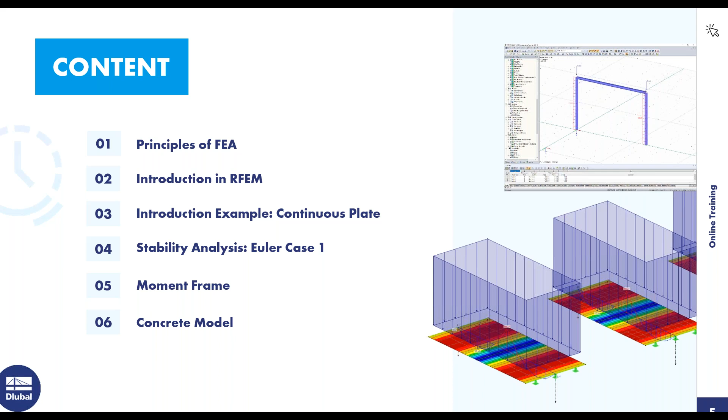So that's it for today's content. Let's start with the basics of FEA software.

When using computer software, it is mostly based on the displacement method. Another method you may be aware of is the force method, where the unknown is the force, and then the internal forces can be calculated.

With the displacement method, the unknown is the displacement, and to solve for this displacement, the displacement vectors must be calculated, and then the internal forces followed by the support reactions.

The main problem today is an analytical solution can be difficult with large complicated structures. So doing hand calculations for some structures with complicated and/or odd geometry can almost feel and be impossible. The limits are being really reached with large complicated structures, and it's hard to get accurate results sometimes. And this is where FEA software comes in and helps.

With FEA software, first, the structures are modeled and converted into a finite interconnected element mesh. Then the material and cross-section properties are given at each FE node. And then the mechanical behavior is transferred between these elements.

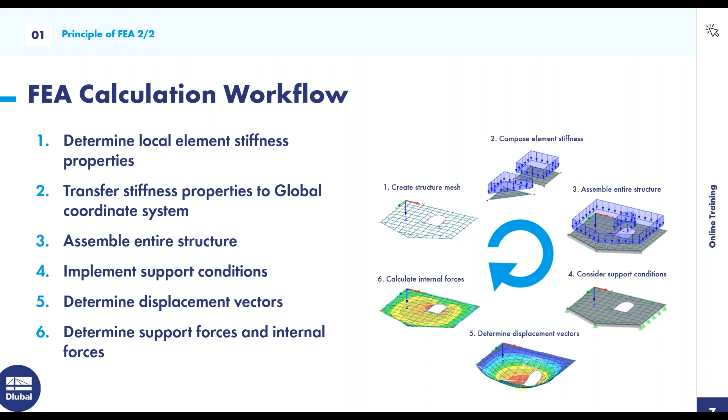All right, so I see some answers coming in. A couple people are saying C, some are saying A. I'll give another 30 seconds to see if there's any more. All right, so it looks like it's pretty split between C and A.

So for this question, what is discretization? The answer is A: it is a structure being converted into finite elements. The other answer a lot of people are saying, C, submeshing finite elements into smaller elements, I could see how that might be confused, but structures converted into finite elements is the correct answer.

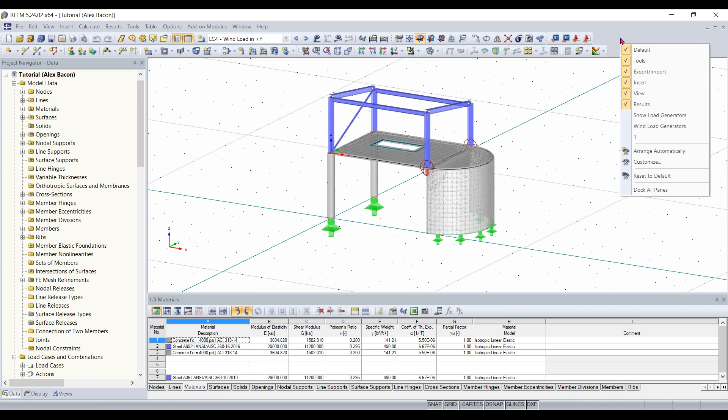The toolbar is what we have up here with all of our tools. Right now it's organized based on the tool, and it kind of looks a little daunting right now with all the tools if this is the first time you've opened RFEM, but over time you'll find it's easy to find the tool you're looking for. If your toolbar does not look like my toolbar, you can simply right click anywhere in this gray area and have this reset to default, and all of these buttons will be reset to default and organized for you.

Up here we have our insert menu where you can insert things like model data, loads, and load cases and combinations. There's also buttons in the toolbar for this. We also have our views up here that we can change through, so we can click through here on our buttons and change and go through our different views.

Then within the project navigator, if I scroll down here, we have our long list of add-on modules, which I'll go over in more detail later on throughout this training.

Next, we have our display tab. Within the project navigator, we have multiple tabs down here. One is called display, and you can see this has a similar design layout to the data tab. Basically, it uses collapsible and expanding folders that you can expand and change different things that are displayed within your model. For example, I can turn off my surfaces if I would like within my model using this. So lots of customization within this tab.

And then we have our views tab. This allows us to change some views and change things within our model. So if we wanted to take a closer look at just our members by a certain material, say I wanted to look at my members made of steel A992 material, I can turn this visibility on, and everything else about my model will be grayed out, allowing you to focus easier on some things and find some things better.

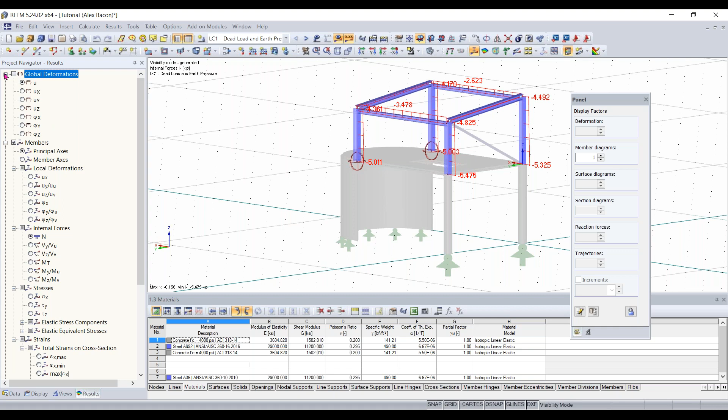And then the next tab, which isn't here right now, will be our results tab. So if I just run a simple dead load case real quick, my results tab will pop up. Within this results tab, we'll go over this in more detail later, but just briefly, this allows us to show which results we would like to see within our work window. It allows us to change and go through deformations, member internal forces, surface internal forces, and strains, along with support reactions, sections, etc. We'll go into more detail with that later.

Next thing is how to move your structure around, how to control it. Right now I'm using a mouse with a scroll wheel, so I can simply click my scroll wheel in and move it around. I can hold control and rotate my model, and I can also zoom in and out with the scroll wheel.

If you do not have a mouse with a scroll wheel, you can go up here to this button called move, zoom, and rotate. I can then just click and move my model around. I can hold control and rotate, or hold shift and zoom in and out. If you're using a trackpad and don't have a mouse, you can use the keyboard and hold control, using the arrow keys to rotate. You can use the arrow keys to go up and down, and then use the plus and minus buttons to zoom in and out.

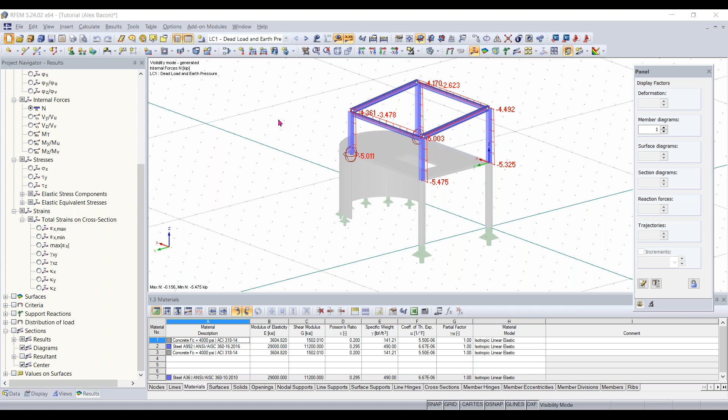We also have a function within RFEM, a project manager, where you can organize all of your models within a certain project folder. If you have a project with lots of different models and don't want to have to keep saving them into a certain folder, this will do it for you. It helps keep everything organized and keep your projects organized.

Next, we have the type of model that we would like to set. For this model, I'll keep it a 3D model. You can also create 2D models within the 3 different planes if you'd like.

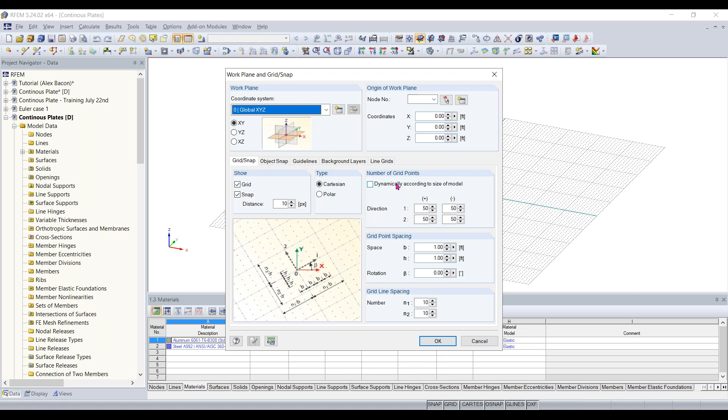We also have the option to change the amount of grid points dynamically according to the size of your model if you'd like. Also, another thing I wanted to point out before we started: if you work in metric — right now for this training, I'll be working in imperial units — but just know that if you want to change your units at any time, you can go up here to Options, Units and Decimals.

If I click on that, you'll see that right now I'm in imperial units, and I can change any of my units for any aspect of my modeling, loading, and results. I can also go down here to this button that says 'load saved profile.' If I click on that, I can double click on metric and change my units to metric if I'd like. I can also set metric as default, but like I said, for this training I'll keep them in imperial. Just know you can change those at any time throughout your modeling.

Hey Alex, another quick question, maybe before we get into it that you can address. We have a question: is it possible to import a DXF or DWG file in order to create the model? Yeah, great question.

You can do that. The way to do that would be to go up here to File, and then we can import different file types. If I go to File, Import, you do have the option to import DXF files and DWG files from CAD or AutoCAD. So you can see we have a lot of different formats and types here. We have the DXF file import, and we can also do direct imports through Autodesk and AutoCAD.

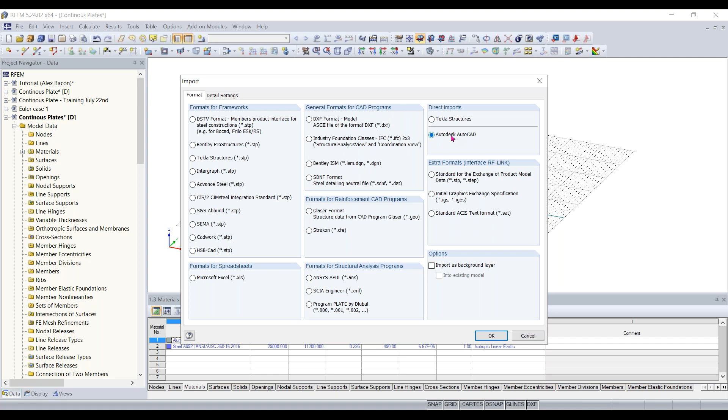Just to further clarify on that: DXF file import is possible. DWG must be converted to a DXF in order to import. This would mostly be used for maybe a background layer, to snap to different points or to import line elements. The direct integration Alex mentioned will allow you to actually import members and 3D faces into the program, and as long as the materials and cross sections match between the two programs, the model will automatically be generated with those member and surface elements. So that's the difference between those two options.

Yeah, that's right. Thank you for that clarification, Amy. Awesome, go ahead. Okay, thanks. Thank you. Yep, you're welcome. All right, awesome, thanks for the question and clarification.

So yeah, let's get into creating these continuous plates.

So the first thing I'm going to do is create a rectangular surface on our grid here, and that surface will be 32 feet by 16 feet. So if I go up here to my new rectangular surface button, and once I click on that, this dialog box will pop up, and all we have to do is tell it which material we'd like to make this surface out of and the thickness of it.

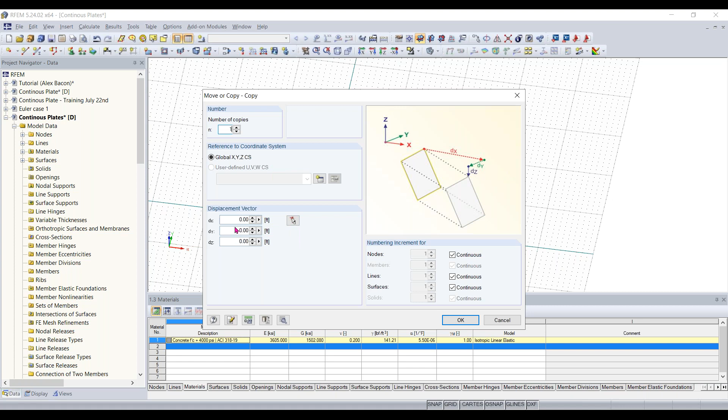I'm going to type in 1 for the number of copies, and then I can either type in the displacement for where I want this plate to go and in which direction, or I can use this button to select 2 points graphically. So I'm going to click on the bottom left-hand corner here, and then I want my plates to be spaced out by 5 feet, which will be right here.

Next we want to create our third plate. I can either use the move and/or copy tool again if I'd like, or I can just highlight this plate.

Then I can hold Control and take this node here, and simply drag my plate. I'll make sure it's 5 feet apart, and then you'll see it made a copy of my plate after I dragged it, because I was holding Control. That's a pretty easy way to make copies of something in RFEM if you know exactly where to place it.

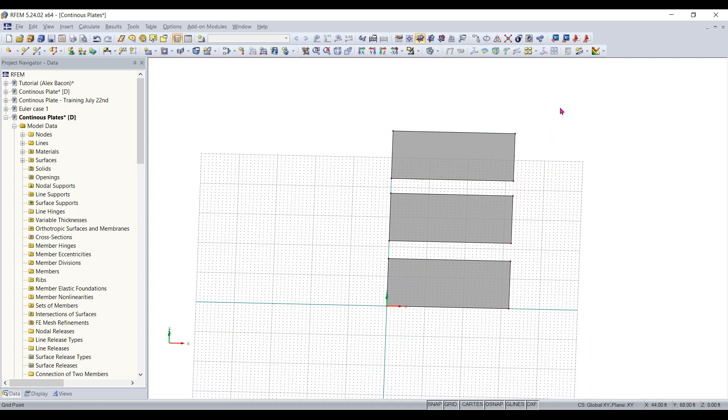So now the next thing I want to do is go up here and turn my tables off, just so we can get a better view of our model here. And I want to take all of these plates and simply drag this and place it directly in the center here of my origin.

Now that we have our 3 concrete plates at a thickness of 12 inches, I'm going to create my continuous beam. To do that, to create a new member in RFEM, we can go up to Insert, Model Data, and then down to Members.

I can do it graphically. It's asking me if I want a single member or continuous. We have a lot of different options here for our members. You can also just go up to this button called New Single Member, so I'll click on that.

Once I click on that, I get this dialog box, and I can fill out this information. Right now it's saying this will be member 1. I can do a rotation of the member, but the main thing I need to do is tell it which cross section I want and the material.

Since we don't have any defined here, just like the plates, I can go to my import from cross section library button. I can also create a new cross section if I'd like. I'll click on import from cross section library, and the cross section library will pop up.

You can see that our cross section library is organized by rolled cross-sections, built-up cross-sections, parametric thin-walled, parametric massive, and timber. You can also create user-defined sections. For this example, I'm going to go up to parametric massive, since we're just going to use a rectangular concrete section.

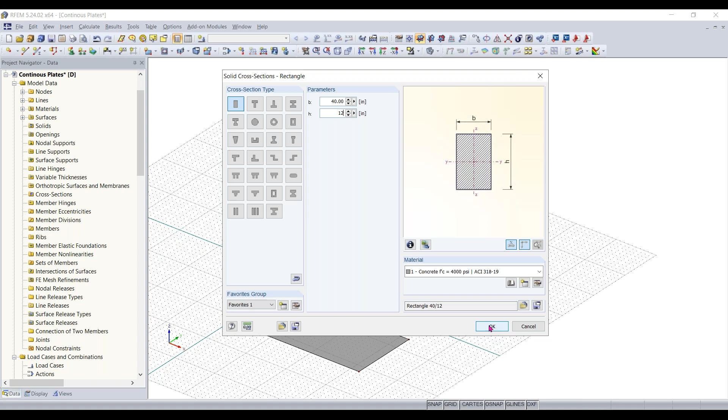Once that's all filled out, I'll click OK. Now you can see our cross section is here with our material, and this is the start of the cross section. So I'm going to click OK again.

Now I can simply graphically draw my member anywhere on my grid. One thing I forgot to mention is that your cursor does snap to these grid points, which is why changing the spacing of your grid points is important, so you can easily draw out your members graphically.

I'm going to place this member 5 feet from this upper plate, and it's going to be the same length as our plate, so 32 feet long. I'll left click, and now you can see that our member has been drawn out. Now we have our plates and our continuous beam here.

Hi, Alex. We have a question. What is the difference between parametric and standard sections? Maybe you could explain parametric versus choosing a section from, let's say, one of the standards.

I'll go back to the cross-section library to point that out. Basically, standard sections are all based on a standard. If I click on our rolled sections, our W beams, you can see I choose a standard here, and these sections are based on that standard — you can't really change the dimensions of these.

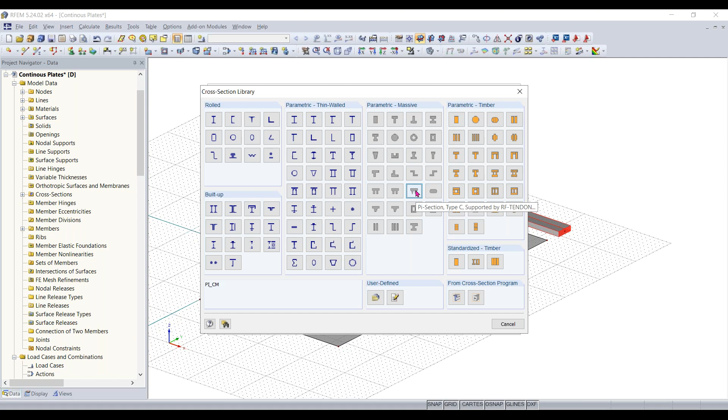Okay, thank you. Yep, you're welcome.

So we created our continuous beam, and now the next thing we want to do is divide our lines here. I want to add some line supports, or a middle support, to each of our spans, to our beam and our plates.

To do that, I'm simply going to divide our lines. If I want to divide a line, I can right-click on the line and my shortcut menu will pop up, then go to Divide Line. You'll see a couple different options for dividing lines — you can divide a line graphically, tell it how many nodes you need from the beginning and end of your line, or tell it to split at a certain distance.

So for this line, for example, I'm going to divide it graphically, and I simply just want to divide it exactly in the middle. So I'll go to 16 feet, and left click. Now it'll place this node and split both of these lines directly at that node.

I'll right click, and then do the same thing for this line up here. I'll right click, go to divide line graphically, and place a node here at node 16. Now both of my lines here are divided.

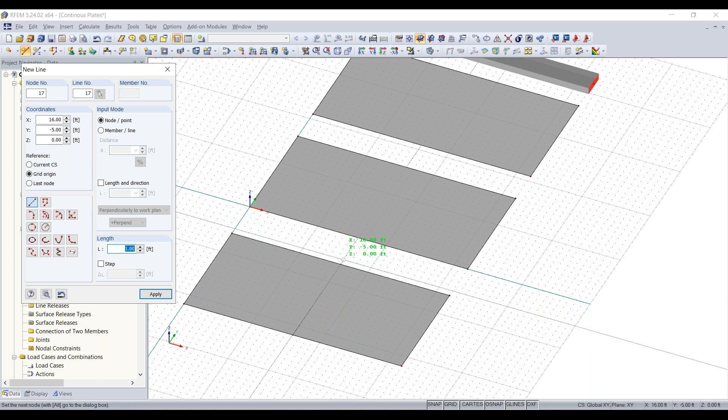Then I'll right click to exit out of that line. And then the next thing I'm going to do is, instead of having to divide these lines here, take this line that I just drew at the midspan, hold Control, and drag it directly above.

Then I'm going to do the same thing. I'll select this line, hold Control, and drag it to the next plate. I must not have hit Control before I dragged it, so let's try that again. There we go. Now we have all of our midspan lines here on our plates.

Next, I'm going to divide my beam here. I'll right click on it, then go up to divide member, and this time divide it by a distance. I could have done this graphically, but for example purposes, if we choose to divide by a distance, this box will pop up, and I can choose the type of division: divide the line by an intermediate node, or place a node on the line without dividing it. We'll have it divide the actual line with the new intermediate node.

Then for the distance relative to, I want the whole member length. You can do projections in a certain direction or on a certain plane. Basically I just want to divide this line at the very center, so 50%. You can also type in a length from the member start or member end.

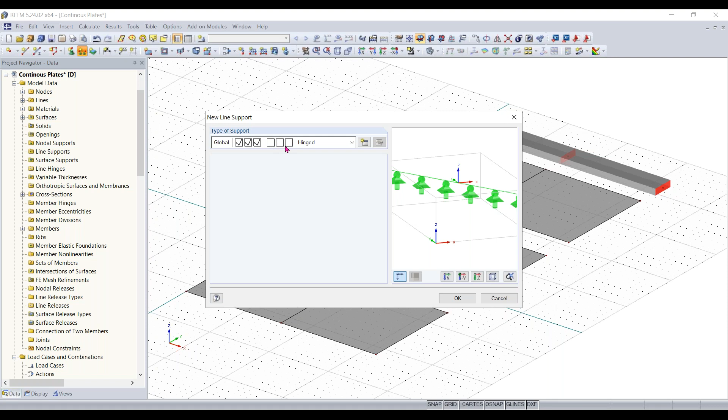So rotation is all released, all degrees of freedom. Translation is all fixed. And then for rigid, we would have all of our translation and rotation degrees of freedom completely fixed, and you can see what those supports would look like here in the graphic.

You can also create new types of line supports, not just the presets. If I open up new line support here, this box pops up, and you can see we have our 6 degrees of freedom, where you can check the box to fix it, or uncheck the box to release it. You can also add in spring constants, and we have nonlinearity options for our supports as well. For now, I'm going to stick with hinged line supports, and I'll click OK.

Once I click OK, you can see this little icon next to my cursor, where the program is saying, okay, which lines do you want to apply these line supports to? I'm just going to apply them to the end, middle, and start of our plates here.

So now all of our line supports are added to our plates. I'm going to right click because now we want to add our nodal supports to our beam up here. I'll go up here to new nodal support instead of new line support, and you'll see this looks basically the same as the line support tool, just nodal supports at point locations instead.

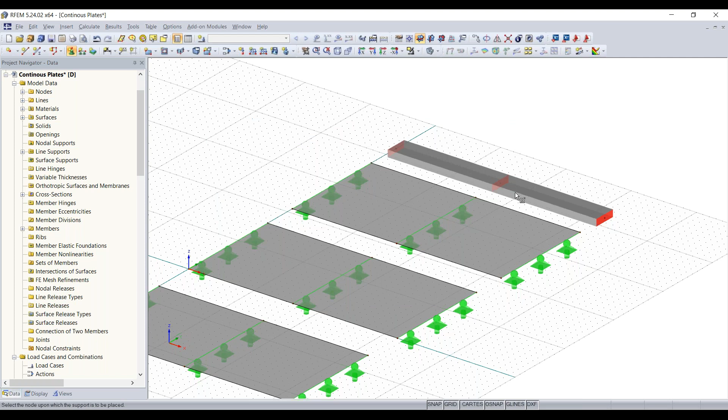Again, we have presets, including sliding in the X direction and sliding in the Y for your rolled supports. I'll keep it as hinged for two of our supports, so I'll click OK. The end of our member here will be a hinged support, and the middle will be hinged too. But our last support here needs to be defined differently.

So I'm going to create a new support for the start of our member here. This support is going to be a hinge support, but I'm going to fix rotation about the local x-axis. And I'll click OK.

The reason I had to create this new support type is because if I had made this whole member all hinge supports, then this member would have infinitely rotated about its local axes. Let me show you its local axes real quick. I'll right click on the member and turn our local axis system on for our members. You can see this is our local axes—Z, Y, and X in lowercase—independent from our global axes. We would have gotten an instability if we'd had all of the rotation released, because it would have just spun about this x-axis. That's the reason we had to create this independent support here, to keep it from rotating.

So now we can add the loading to our model here. We can do this in various different ways within RFEM—we can add our loading through the tables here, I can go to table 2, or I can also do it through the project navigator. But the first thing we need to do before we can add in our loads, which is very important, is to create a load case, because every load needs to be assigned to a load case.

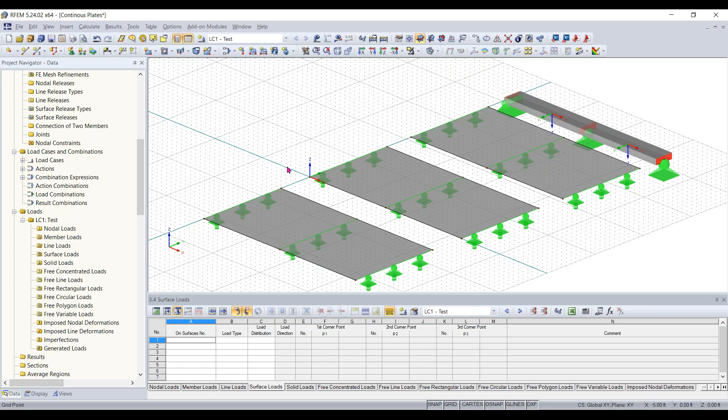So if I wanted to add any of the loads here, I could do so. But I'm going to go up here and click on a surface load because we want to add loading to our surfaces here. So I'm going to click on this button called New Surface Load.

Once I click on that, I need to go through this dialog box. Basically it's telling me the number of the load assigned to this load, and it's asking me what surface numbers this load is going to be on. You'll find out after I fill this information out that we can just graphically assign the loading.

So I want the load type of this load to be force, and I want the distribution of it to be a uniform distribution, so I'll keep that the same. Then I need to specify the direction. I want it to be in the global Z-axis. And now I just need to tell it a magnitude. This is set in kips per square foot, or KSF.

I'm just going to have it be negative because I want it to go downwards, 0.210. So basically 210 pounds per square foot.

I'll click OK. Now you can see my cursor has this icon next to it telling me I can select my surfaces that I want to apply the loading to. So I'm going to apply it to this first surface, the second one, and then the third one. Then I can right click and see my loading graphically now.

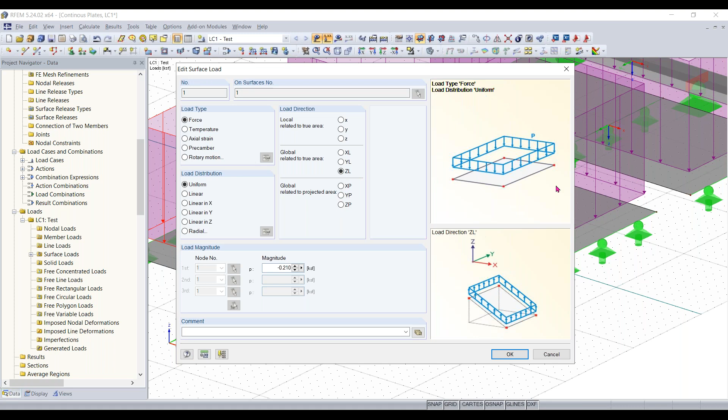So we'll stick with the true area, which I guess, for example, for this, it wouldn't really matter if we chose projected or true area since it's completely flat. So we'll click OK. And now we have our loading placed on our plates here, 210 pounds per square foot. Now we just need to place the loading on our continuous beam here.

I'm going to turn off or hide the loading here, just to make things easier to see.

To place a uniform load on a member instead of a surface, we have two options: a new member load. We also have this new line load tool, which is only for lines that are not members, so keep that in mind. For members, always use member loads, and for line loads, always use the line load tool. So we'll click on new member load.

I'm going to go through this dialog box again. You can see it looks similar to the surface load dialog box. The load type will be a force, and the load distribution will be uniform. You can see we have some different options here for that. We also have the load direction.

So for global related to true member length, we're going to choose that one. Again, you can choose projected in the global direction, or you can choose the local axes. For load parameters, we're going to keep the loading relatively the same as the loading on our plates, so that would be negative 0.210 kips per foot. We'll click OK.

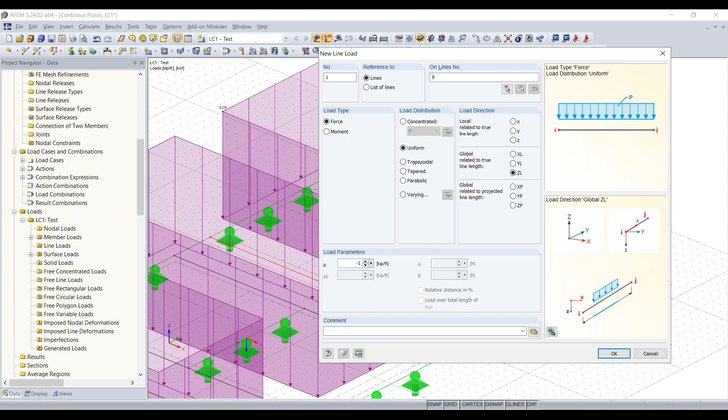So let's say I wanted to apply loading along the perimeter of my plates, I would use the line load tool and simply type in a magnitude. If I go back to the line load tool, I could use it to apply loading to the lines that make up the perimeter of my plate here—they're not members, they're just lines. But if I wanted to apply a load to a member that actually has a cross-section and material assigned to it, I couldn't use just the line load tool—I'd have to use the member load tool.

I think an easy way to remember is: member loads should be applied to members, and line loads are applied to either surfaces or solids. Otherwise, the program will flag you with an error. So yeah, that should explain it.

And just to let you know, on that third surface, you still have an existing line load that you'll want to delete. Oh yeah, okay. Thank you, Amy. Yep, sure. Okay, thank you. You're welcome. Great question, so I'm going to delete that.

So now we have our loading, and the next thing we're going to do is add FE mesh refinements to these plates here. So just a quick overview for our FE mesh.

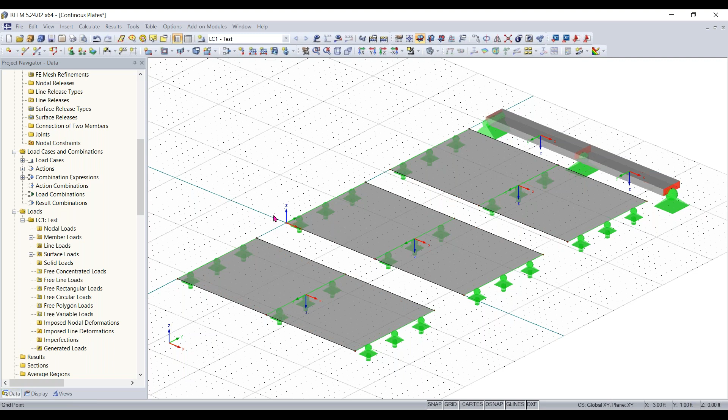Basically, the FE mesh in RFEM is automatically created when you run your calculation. There's a set length to your finite elements—by default, with imperial units, it's 1 foot by 1 foot. But let's say you wanted to change that mesh length for a certain element, say these plates—you don't want them to be 1 foot by 1 foot, you want to change them to something smaller and more refined. You can use an FE mesh refinement to change the finite element length on a certain plate.

So I'm going to add different FE mesh refinements to these plates. This might be a little confusing right now, but it'll start to make sense as we move through the example. I'm going to start with this plate by clicking it.

I'm going to right click on it, then go up here to the option New FE Mesh Refinement, and click New. It's saying I don't have any FE Mesh refinements defined, so I can create a new one, which will be applied to our surface here.

For this first surface, I'm going to have a super fine refinement, with my target FE length set to 0.2 feet. I'll click OK. Now you can see this icon telling me an FE mesh refinement is placed on the surface, and this symbol shows how large that finite element will be.

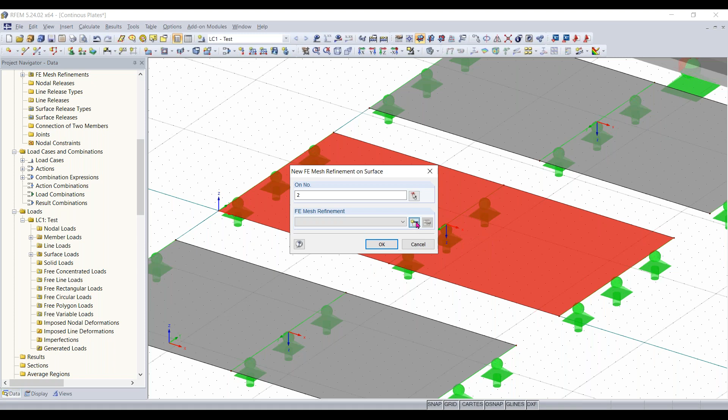So I'm going to do the same thing for this next surface, adding another FE mesh refinement. I could choose the previously defined refinement, but for this surface I'm going to make it a bit bigger. I'll create a new refinement and, for example purposes, make the finite element length 0.4 feet.

Then for the next surface, I'm going to right click, create a new FE mesh refinement, define it, and make it 0.6 feet, then click OK.

Now you can see we have our surfaces here with three different FE mesh refinements on them, and you can see the elements get a little bigger from 0.2 feet to 0.4 feet to 0.6 feet. So you can see graphically the different sizes of those.

The next thing we want to do is create sections for these plates, adding section cuts along the whole span of them, down the center. To do that, I can rotate my model, go up to this button, and hit the arrow drop down for different options within this tool. I want to create these sections numerically.

I want to give my section a name, so I'll name this first one AA. I want to cut through my surface via a plane, and I just need to tell the program the first and second point to cut through. I can do that with coordinates A and B, or simply click on select edge points, and choose the first point here.

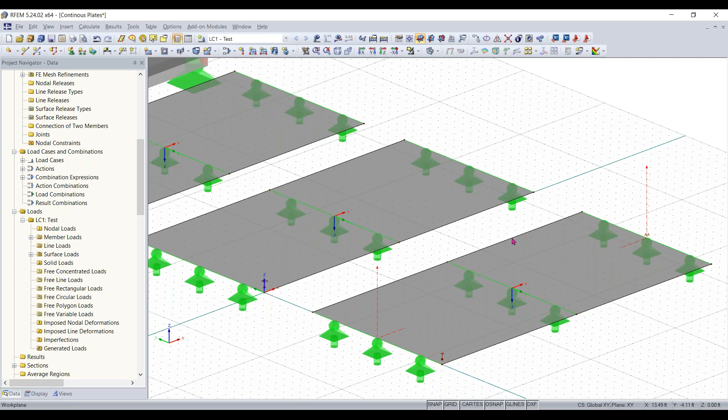Your cursor will snap directly to the midpoint, just like in AutoCAD—there's a little symbol telling you it's the midpoint of that line. I'll snap to that, then snap to the next point, which will be the end point. It's asking me to select the section on the surface or the projection—it's just a vector, automatically done once you select your edge points. The plane will be in our local positive z-axis plane, and everything's filled out now, so I can click OK. Now you can see graphically we have these arrows symbolizing a section cut through our plate.

Now, instead of going through all those parameters again, I can hold Control and use the powerful workflow of dragging and copying these section cuts to my other plates here. Now we have all of our section cuts.

Dragging and copying does give some different nomenclature, but we can easily change that within the project navigator. I can go down here to the Sections folder, expand it, and change the name of my sections by double clicking and editing them. I'll make this one AB, and this third one AC.

And I'll click OK, and now we have all of our section cuts here with their different names. So now basically everything is ready to run our calculations. We have our supports, our plates with cross sections and areas with materials defined, our load case, and our loading assigned to that load case.

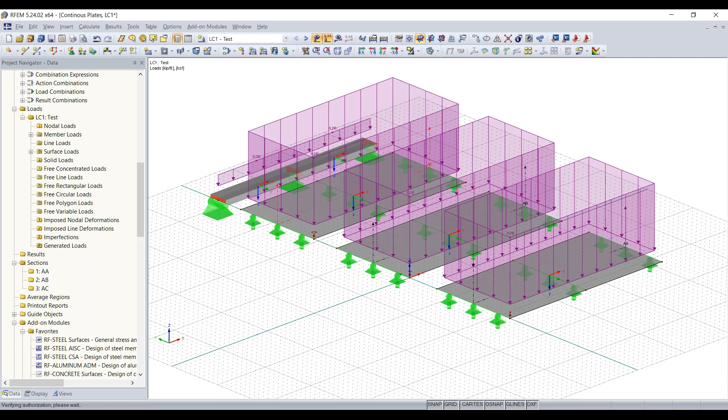Hey Alex, while that's running, we have a good question from an analysis point of view: what is the difference between an FE mesh refinement and simply splitting the surface?

From an analysis point of view, splitting the surface really wouldn't change too much. I could split the surface into two different surfaces, or keep splitting them smaller and smaller, but no matter what, the FE mesh will stay the same length on the surface. Whereas changing the actual FE mesh length will increase the accuracy, as results will be assigned to many more points along the length of your surface, if that makes sense.

A user could take a surface and keep splitting it into smaller and smaller surfaces, and the program will adapt the FE mesh to accommodate all of these small surfaces, so that maybe you only have an FE mesh element of 1 across the width of all these small surfaces. So this could definitely be an option instead of defining an FE mesh, as the program will adapt to that.

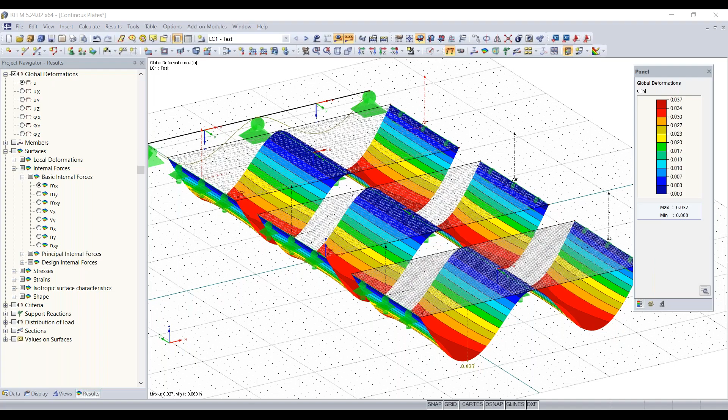So now that everything's calculated, we ran our results for load case 1. You can see right now we are showing the global deformations of all 3 of our plates here, and this yellow line is the deformation of our continuous beam. We're also showing the resultant of this deformation.

We can also go into our components for our deformations, and we can show the internal forces of our member. We can view our moments about our local y-axis here, getting a nice moment diagram graphically on top of our beam.

I can turn this back into our solid transparent render view, but it's easier to see the diagram here with just the wireframe view on.

We can also take a look at our surface internal forces, or the results on our surface, such as the moments along our x-axis. You can see these deformations on our surface and the internal forces are color-coded, and we have a panel here that allows us to see what value is assigned to the color on top of our surface.

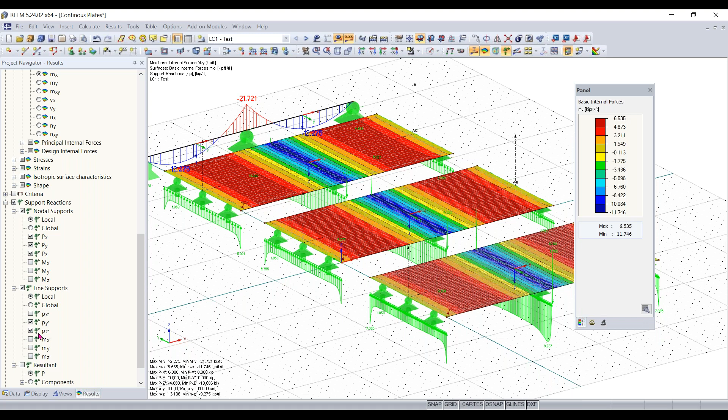We can also take a look at our support reactions. So we can turn our support reactions on and get a look at those. We have a choice between nodal supports and line supports, and we can see which direction we want to see those reactions, along with our moment reactions if we'd like to view those.

And we can also activate our section. So I'm going to turn off these support reactions and collapse some of these just so we can get a better view. If I go down here and turn on our section cuts, I can get a nice view of our section. So now you can see the results.

You can also maybe now see the difference in accuracy between the plates that have different FEM mesh refinement sizes. So now I think it's a good time to mention that the size you pick for your FEM mesh affects your results. You can go up here to calculate, and then we can go into the calculation parameters tab.

Once I go into my calculation parameters tab, I can go under the global calculation parameters tab at the top. There's a couple other tabs, but we'll just focus on this one. Within this tab we have lots of different options, but I mostly wanted to focus on one option here: this says activate shear stiffness of members.

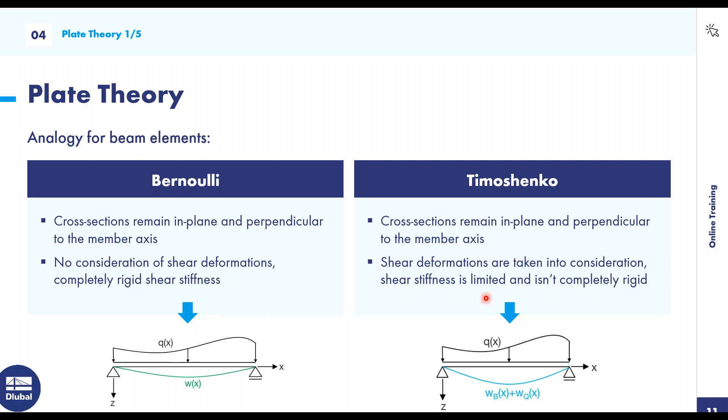So I have a graphic to represent what this means between these two theories. With Bernoulli's theory, here you can see the deformation is perpendicular to the member axes. But with the Timoshenko theory, here we have an additional angle incorporated, so we have a different additional deformation. This is due to the assumption that the shear stiffness is not completely rigid, and we take shear stiffness into consideration.

Taking these two theories, we can apply them to plate theory, as they are a little bit similar. So an equivalent analogy for plate elements: we have Kirchhoff's plate theory, and then we have the Reissner-Mindlin plate theory.

These are similar to the Bernoulli's and Timoshenko theory, and you will see why. So if we show the assumptions for the Kirchhoff theory,

These can be compared to the beam theory. So these assumptions, basically, we assume for the Kirchhoff theory that we have very small deformations, and it's a geometrically linear calculation for the deformations. We assume the material is linear elastic using Hooke's law. We assume the cross sections for these plates remain flat with no warping. We have a constant thickness, and most importantly for this theory, we do not consider shear deformations.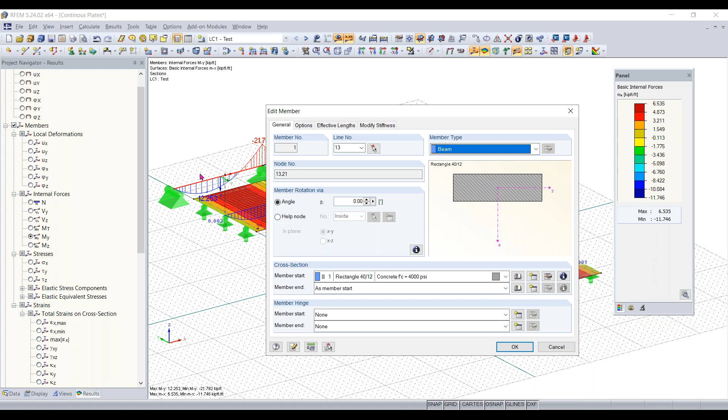Yeah, so member types is something I didn't go over yet, so I can briefly go over that right now. So basically for this beam we have, this continuous beam, it's set to beam. If you're designing a column, for example, there's no column type. You just want to set it to beam, and the program will automatically be able to detect if it's a column based on the axial forces applied to the member. So for beams and columns, you want to choose the beam type.

But like Amy mentioned, for nonlinear members, we do have things like tension-only members, where they will fail if there's any compression force. We also have cable members. We have a long list of different member types here, so nonlinear members there as well.

So we discussed basically the different plate theories between Reissner-Mindlin and Kirchhoff, and then the beam theories between Bernoulli and Timoshenko. Just to recap again, the Reissner-Mindlin theory takes shear deformations into consideration, and the Kirchhoff theory does not take shear deformations into consideration. These theories can be changed within our program under the calculation parameters here.

So if I go there, and then I go under here, you can see under plate bending theory, we can choose between Mindlin and Kirchhoff. Right now, shear deformations are taken into consideration for our plates. We did deactivate shear stiffnesses for members.

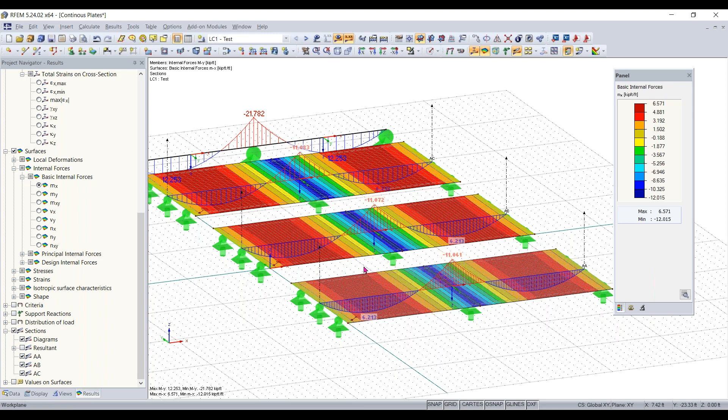We can do that real quick. I'll click OK. So right now it's running according to the Kirchhoff theory, so no shear deformations are taken into account. We can see how our results have changed. They changed very slightly. We have 11.08, 0.07, 0.06, and I wasn't expecting too much of a change because our plates aren't really too thick, they're only 12 inches thick.

Let's say we changed the thickness of our plate here from 12 inches. I can do that easily just by double clicking on it. From 12 inches to 20 inches. We'll click OK, and it's going to ask me to recalculate. I can do that real quick.

And again, with the Kirchhoff theory, with thick plates, it's not really a great theory because the thicker the plate gets, the more inaccurate your results will be if shear deformations are not considered. So you can see here, our moment has increased, it's at 14 kips per foot.

So if I go up here to calculate and change this back, taking shear deformations into consideration with the Mindlin theory, we'll see how much that value changes from 14. So that ran, and you can see now we changed from about 14.08 kips per foot to 13.9. So you can see how much of a difference that makes between those two theories, and how it changes depending on the thickness of your plate.

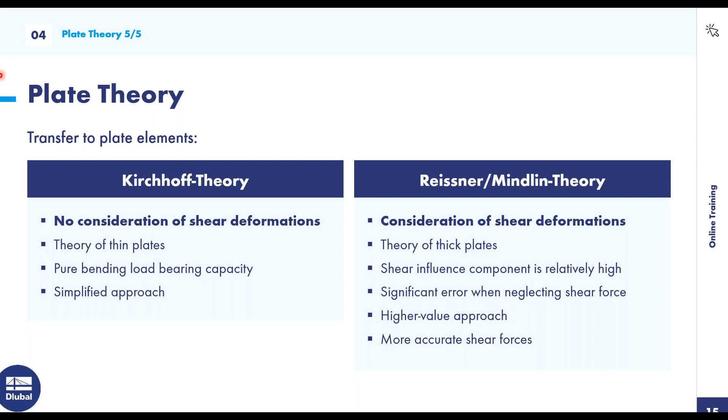And the question is, what happens if the shear stiffness is activated? Just to make sure everyone's clear on this, here are the options for the answers. First option, shear deformations are considered. B, increased accuracy in results. Or C, the shear stiffness of elements is infinitely rigid. So again, you can type those in the chat and then we can go over the correct answer.

All right, so I'm seeing mostly A, B, there's one C. So for this question, what happens if the shear stiffness is activated? This is mostly pertaining to the beams. If shear stiffness is activated, the correct answer is shear deformations are considered. So with shear stiffness activated, this is basically saying, is the shear stiffness infinitely rigid or not? Like I mentioned, in school you assume shear stiffness for everything you calculate is infinitely rigid, and shear deformations are not considered. But by default in RFEM, shear deformations are considered, and it's not assumed that it's completely infinitely rigid. So the correct answer is A for this one.

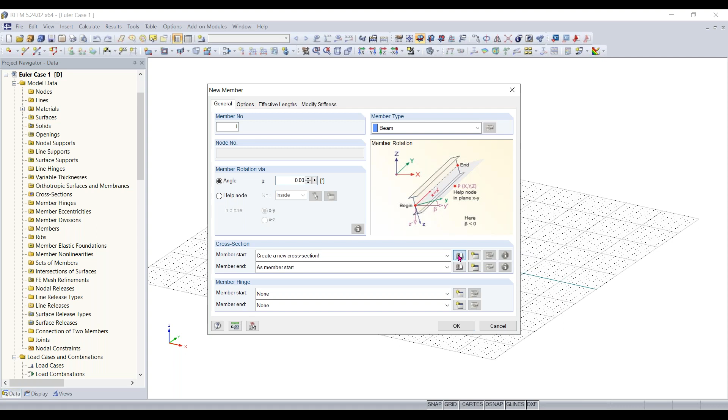Once we click OK, our blank grid will pop up, and then we can begin creating our simple beam here. First thing I'm going to do is go up to new single member, and create a new member. I'm going to import it from our cross-section library. I'm going to choose this member from our rolled cross sections, from our I sections, based on a standard. For this example, I'll use the AISC, and I'm going to choose the latest. We're going to choose wide I sections with parallel flanges, and it's just going to be a W section, not really too important which exact cross section.

We're just going to choose 12 by 35. And then the material, you can see I have some that were carried over in this template. I'm going to just keep it as steel A992, that works for this example. So I'll click OK, and click OK again. And now I need to draw my member. I want to draw this member as a column, so this is going to be a column.

I need this column to be perpendicular to the grid surface. One way to do this is by choosing the length and direction option, giving it a length of 30 feet, then telling it to draw perpendicular in the positive direction to my work plane, and placing the column.

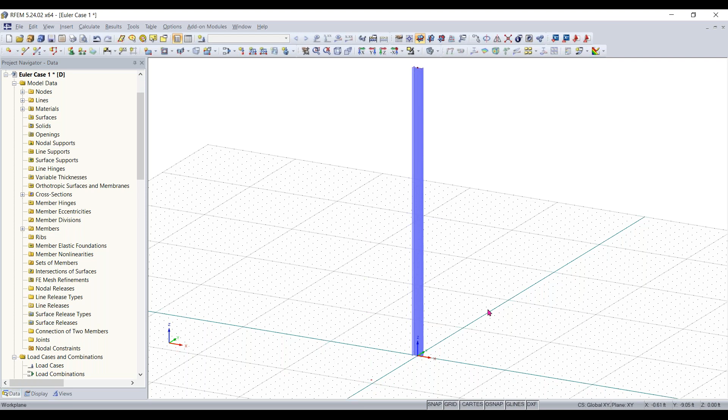But if I drew from right to left, anything that touches the highlight box would be selected. That's the difference between drawing left to right versus right to left, which is very helpful for selecting things.

I'll go to New Nodal Support, and this support is going to be a fixed support, so all 6 degrees of freedom will be fixed. I'll click OK, and now you can see my rigid support has been added to my node at the base of the column.

Now the next thing I need to do is create a new load case. The first thing you always need to do before adding any loading to your structure is create a load case, because each type of loading needs to be assigned to a certain load case. You can't have loading without a load case.

So we'll create our load case here. The name isn't really too important, I'll just call it test. Action category, keep it dead. We could have self-weight activated with dead, but for this example I'm going to uncheck the active box, so self-weight won't be taken into consideration. I'll click OK.

Now I'm going to create a new load, a point load, which I don't think I've shown yet. A point load is added to a node, so to create a new nodal load I'll click New Nodal Load, then tell the program the magnitude and direction. I'll do it by component, a downward force of 5 kips.

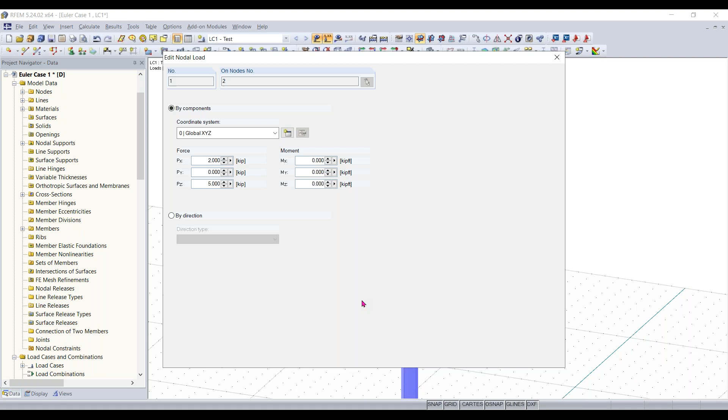I just realized I needed this point force facing downwards, I forgot to add the negative sign. Let me double click and add a negative — oops, I meant to change the one in the x direction. Let me go back, add the negative there, and delete this one. Not too important, there we go. Now we have our downward force on our column.

Now that we have our loading applied for the column, I'd like to get into something very important.

So we have our loading, our column, our support here, and our load case. Something important to go over, you'll see once I click calculate. I hit this button called show results for this load case, and when I click on that, it asked me if I wanted to calculate the results since they weren't run yet. So now we have our global deformations for our column.

If I get an elevation view of our column, you can see our deformation, our maximum deformation, which is 3.782 inches. I can also check out the internal forces of our column, and take a look at the moment along the length. You'll see the maximum moment is at the bottom, at negative 60 kip feet.

Now that we have our deformation and internal forces looked at, again, 60 kip feet, our global deformation was 3.782 inches. I need to show you how this linear, or first order, calculation differs from a second order calculation. So what does that mean exactly?

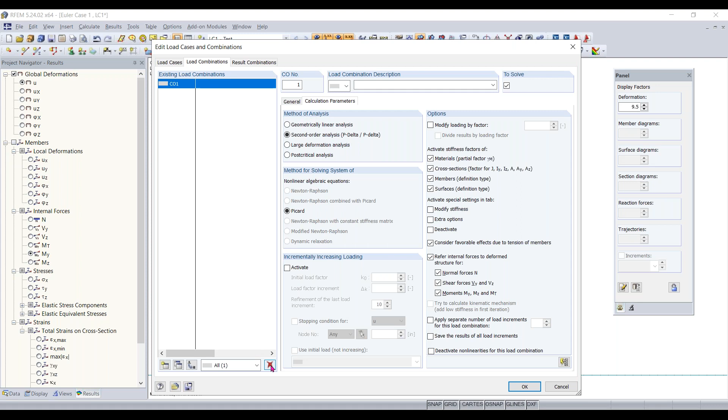So I'm just going to delete this load case real quick. Basically, the difference between a first order and second order analysis is this: a first order analysis sets the equilibrium of the beam based on the undeformed system, while a second order analysis sets the equilibrium based on the deformed system. So I can show that.

If we change this to a second order analysis and click OK, we can rerun our results. You should see that the deformation and bending moment has increased. Taking little and big P delta into account, we now have a larger deformation at 3.905 inches. And if I turn on my member internal forces, we went from 60 kip feet to 61.6 kip feet, because of the P delta effect.

Since the deformation increased, the applied axial load has an increased moment arm, which in turn increases the maximum moment that we have down here.

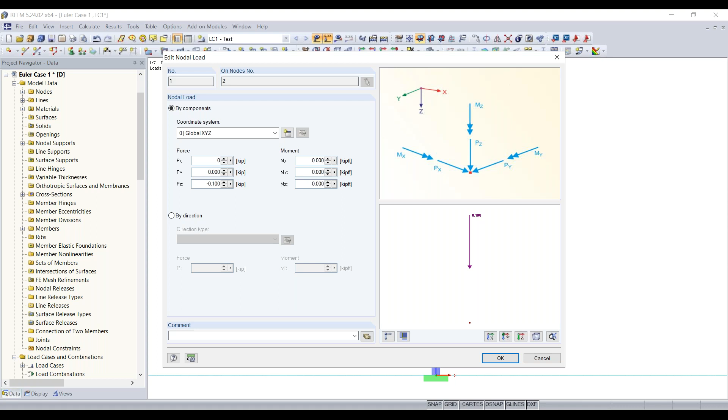Now we're going to get into the add-on module RF Stability, so I'm going to change that. Basically, to go over add-on modules again, add-on modules for RFEM are separate dialog boxes, but they are mostly used for design.

For example, if I go up here to add-on modules, we have them organized by material. We have RF Timber for timber design, and RF Timber CSA for Canada. Also for aluminum, we have the ADM, RF Aluminum ADM module for aluminum design. For concrete, we have RF Concrete Surfaces for designing reinforcement for both columns and beams, and also RF Steel for steel surfaces and members, with separate modules for different standards such as the EC3, the AISC, and the CSA.

So we have lots of different design modules along with dynamic modules. We also have our stability module, which we'll get into, and then a couple others. To open an add-on module, it's as simple as just clicking on it.

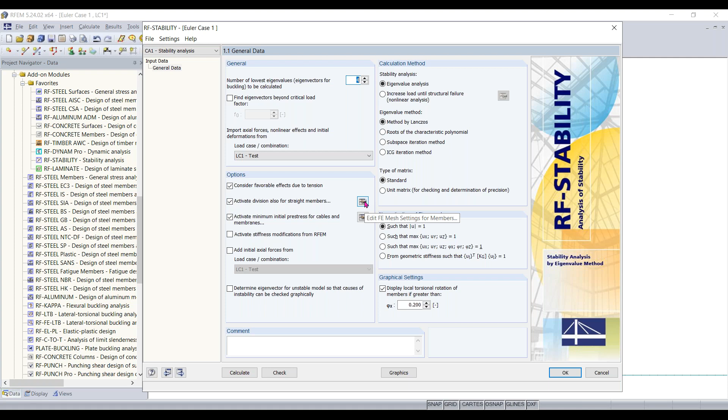And find out if our structure is stable and can handle the loading applied to it. The first thing I want to do is activate the division of straight members. I can do that right here. Right now it's already activated by default. I can also hit this edit button, and then go down here to minimum number of member divisions. Right now it's 2. I want to increase this to 10 just for more accuracy. And then I can simply just hit calculate.

So my calculation will run. And once that's done running, we will get our results here. So we had our input data, and now we have our results. And right now we're showing our critical load factors.

Basically these critical load factors are the amount you would have to multiply the loads by in order to get an unstable system. So right now it's at 135.247 for this first eigenvalue number, or eigenmode, and I would have to multiply the loading on my beam right now by 135 times to basically get an unstable structure. It can also be looked at as the total percent of the loads your structure can take.

And then we have our effective lengths in this next table here, table 2.2. So we can get a better look, we have our effective lengths, and we can also take a look at these effective lengths or our results graphically. If I go down here and hit graphics, right now I'm looking at my first eigenmode 1.

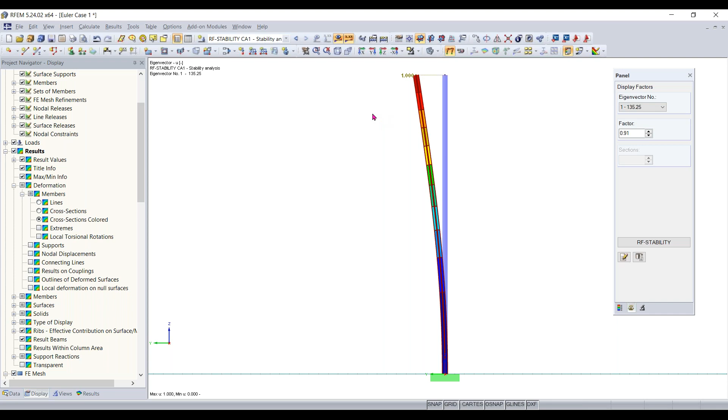I can go back here to the tab in my panel, factors, and I can simply scroll through my different eigenmodes so you can see what those look like. We're mostly focused on eigenmode 1, and I think it's clear that the column will first be unstable in its weak axis. If anything, the weak axis will be the most unstable, and basically the weak axis for this column is in the y direction about the local z axis.

And we can see that if I double click on it. So we have our z axis and our y axis, and we're going to have our weak axis bending about the z axis here.

And another easy way to look at this is if I go to my info about cross section. I can then scroll down here to my modulus of elasticity, or to my moment of inertia. Here it is. So I can see my moment of inertia about the y-axis and z-axis, and you can see about the z-axis, my moment of inertia is a lot less.

So that's another great way to see which axis is the weak axis. We can close that. And yeah, so that's basically the reason why the column buckles about the z-axis.

So now we can go back easily to RF stability by just going to my project navigator here, and you can see that out of all of my add-on modules here, RF stability has thicker text to it, telling me that I have results or have data saved in it.

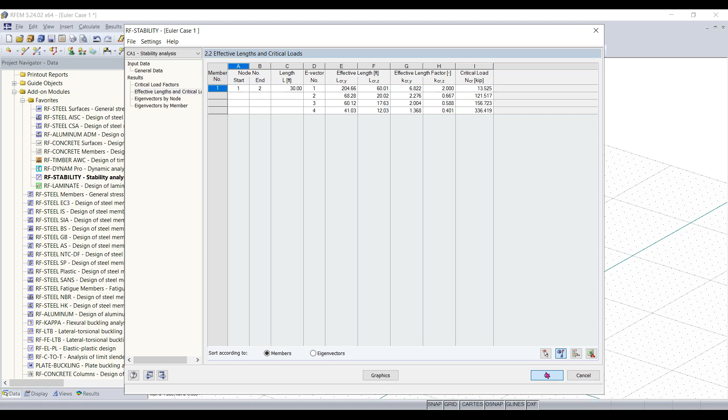So let's say I'll click OK, and I'll go back up here to my dropdown and go back to my load case 1, and I can change my loading real quick to something that would make this column unstable. So I will turn this to, let's say, negative 14 kips, and I'll click OK.

And right now I have, let me just make sure that my method of analysis is linear. So right now it's set to second order. Let's see what happens if I have it set to second order with too high of a load.

If I go into RF stability, and then when I'm in RF stability, I want to make sure my model is stable, so I'll click OK. And run the calculation, and it's giving me an error message basically saying LC results are not available, and this is because my model is unstable.

So what I need to do is go to load cases and combinations, and basically when a model is unstable, you can't get RF stability results when it's running according to a second order analysis. We need to change this to a geometrically linear analysis, so I'll click OK.

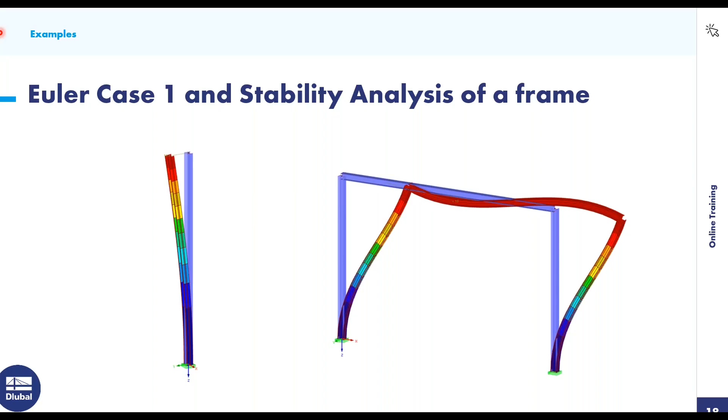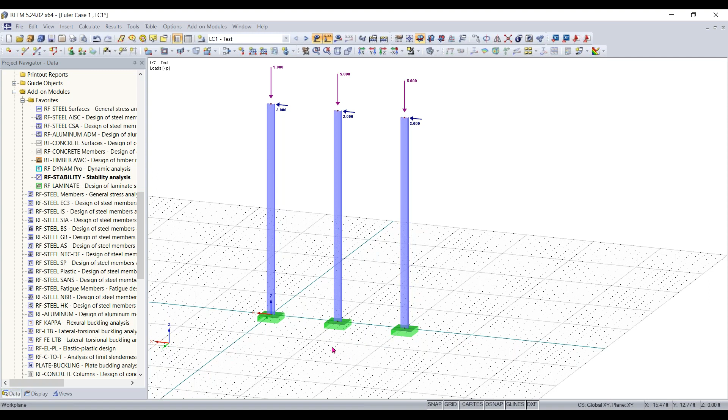I want the columns of my moment frame to be 10 feet apart. To change the height of my two columns quickly, I can drag from left to right, then double click on the nodes and edit them. If one of the coordinates for your nodes is the same as the other node, you can change it. The coordinate for these two nodes, 4 and 6, have the same z coordinate, so I'm going to change this from 30 feet to 10 feet, and it'll shrink down both my columns to 10 feet.

Now I need to add in my beam to connect my two columns. I'll go up here to new single member, and create a new member from the cross-section library. This is going to be another I section. I'll scroll down, and this section is going to be an 8 by 15. I'll keep the same material. Click OK, click OK again.

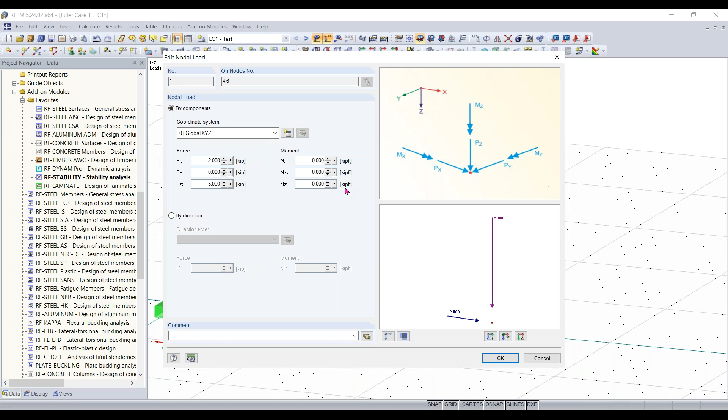Then I'm simply going to draw this beam and connect both of my columns. I'll right click, and now I have my moment frame basically. I'm going to take out both of the lateral forces by holding Control and selecting both of my loads and deleting my lateral force. I'll hit OK, so now we basically just have our moment frame here.

What I can do is run my calculation. Once that runs, we can take a look at our normal forces. Right now we don't have any moments about the y-axis. We can take a look at our global deformations as well, but really not any right now on our moment frame. So what we could do is increase the loading.

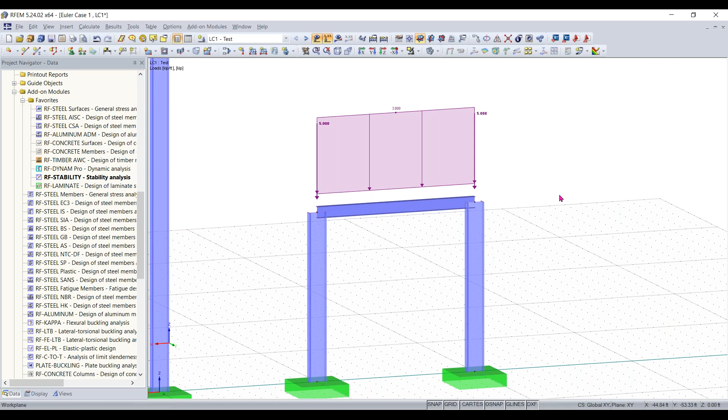But also we could just add a uniform load to it. So I could go up here to new member load, go to force, then go to uniform and have it in the global z direction. Then I can apply something like -5 kips per feet. Hit OK, and apply that to our beam here and rerun our calculation.

And we should see some more interesting results. It's a little tough because the deformation of our column here is a little higher than our moment frame. If I went to view, visibilities, and did this by member cross section, you can see we have a better view of our deformations, of our cross section. We can also get a better view of our internal forces, or our moment diagram, on our beam here.

We could also just turn off our views and then again see the results on the rest of our frame. We can also go up here, scroll down, and choose our RF stability case, and then run our RF stability results.

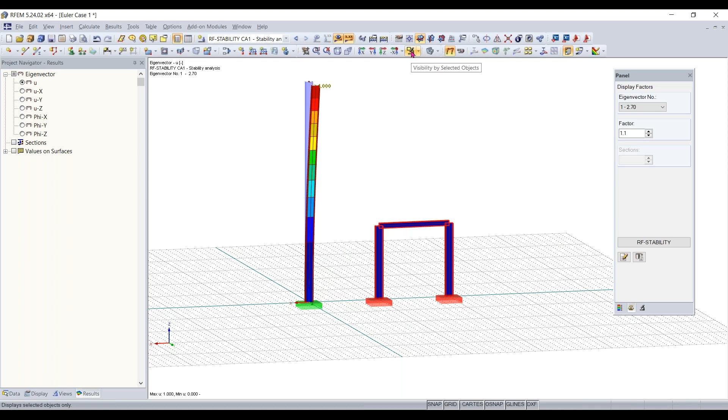Now we can take a look at our results for our moment frame. What I can do is highlight this, then make a visibility by selected objects, and I can simply keep my moment frame. I can right click and turn off show hidden objects in the background, then go over here to filter, and specifically just show the results of the moment frame filtered.

Now we should be able to get better looking results for our eigenvalue here. So if we go into general data, and then let's go back and turn off, cancel this visibility, and we will have this set to all.

And then if we deleted our column here, and went back into our stability, and ran the calculation, now we should see our critical load factors for our moment frame. So 4, pretty good for the first mode. Now we can get a better look since our column is not taking up the results there.

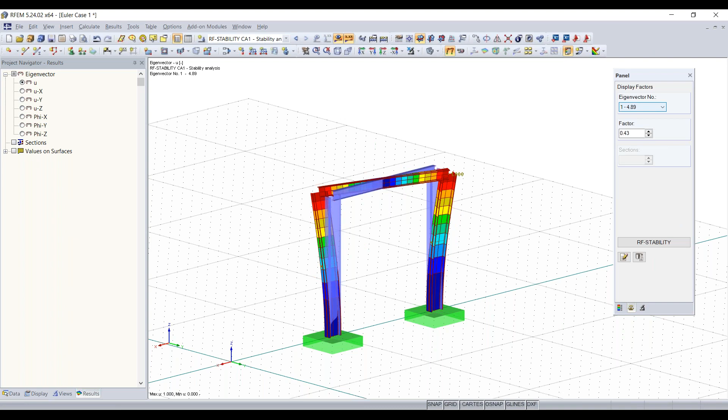So we can scroll through here and see our different eigenmodes for our frame. You can see the first eigenmode - right now our frame is bending out of plane for our first, and you can see our other four by scrolling through here. We can also increase the factor to get a better idea of what these look like.

Let's say for our frame, we really don't want it to deform out of plane here. So what I could do is simply highlight both of my two nodes here. I can hold Control and highlight them, and add a nodal support to them.

And this specific node support, I just want to have it keep my frame in the XZ plane. So I'm going to allow it to rotate about all axes or all degrees of freedom for rotation. And then I'm going to allow it to simply not be able to move in the Y direction, so it can move in the X and Z direction. So we can click OK.

This will basically allow it to move up and down and left and right, just not forward and back, and rotate. So now we can see what this looks like, and you'll see that it'll keep it in plane, and we should have a higher critical load factor.

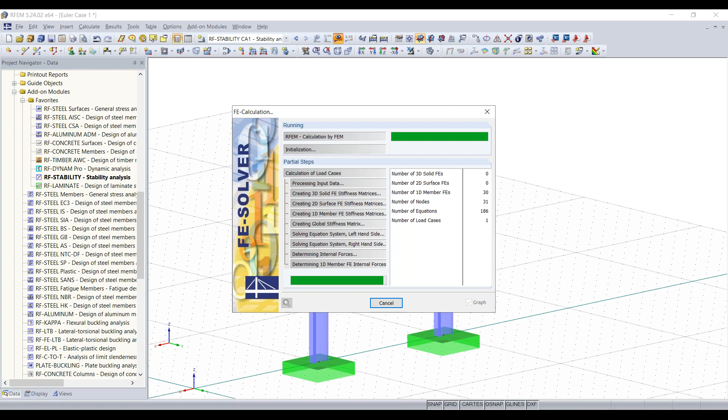So if we go back into our stability, you can see that my first eigenmode looks a little bit better, and now we have a higher critical load factor of 21. So we increased the stability of our moment frame here. And that is the end of the stability example.

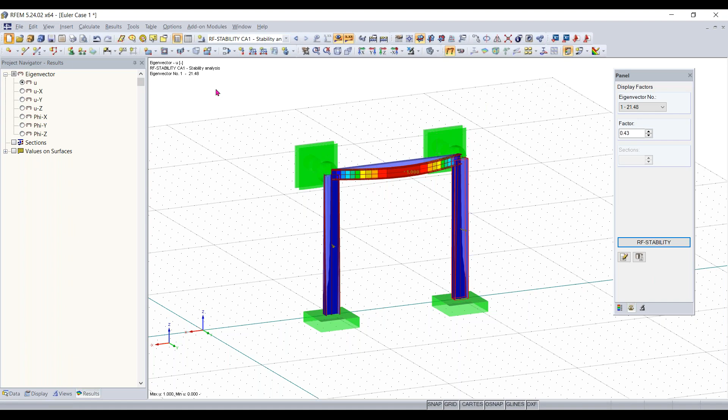So again, create a new model. We can go up here to new model, and this new model will be the concrete model. We can give it a description and we'll keep it 3D. And then for the standard, we're going to select ASCE 7-16.

And for this one, we are going to create combinations automatically, so we'll get to see how that works. And we're going to keep the positive orientation of our global Z axis upward. So all of this looks good, we can click OK.

And now we have our blank model here. The first thing we want to do to create our model is to first create the floor - we want to create our floor slab of our concrete model here. And to do this, we are going to use the new rectangular surface tool.

And then choose our material, so we want to go to import new material from material library. And we're going to go under concrete and then standard - we'll just use the ACI and the most recent standard, 4,000 PSI concrete. And we'll keep this all the same, 8-inch thickness. Then we'll click OK. And basically the floor of the structure is going to be 46 feet by 40 feet.

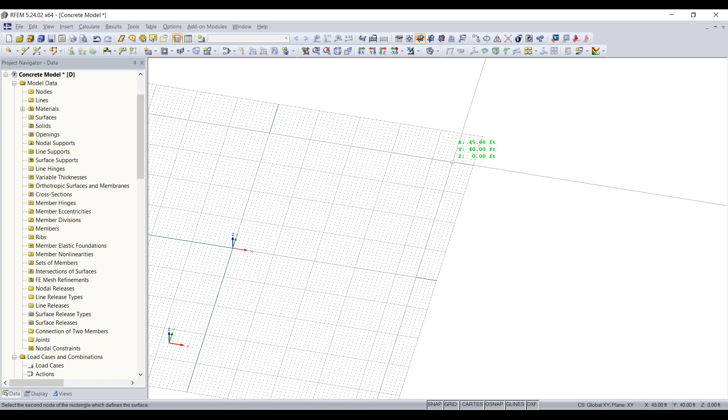So we'll go up here to 45 by 40. And now we have our floor slab down.

Now the next thing we want to do is basically create the columns that are going to be supporting our ceiling. So I'm going to go over here on the very left-hand side, select my node here on the origin, and then go up to my move/copy tool.

I'm going to make one copy of that node, and move it 2 feet in the X direction and 2 feet in the Y direction. I'll click OK. And now I have my first node placed here, which will act as my base for my column.

Now I just want to do basically the same thing, just create two other nodes. I'm going to again use the move/and/or copy tool and make 2 copies of that, but I'm going to only have it be displaced in the X direction, 16 feet. So I'll click OK.

Now my corner node over here, I'm going to also make a copy of, but this time I'm just going to hold Control and move it. Hold Control and then move it. There we go, make a copy of it. So now we have our first row of nodes here.

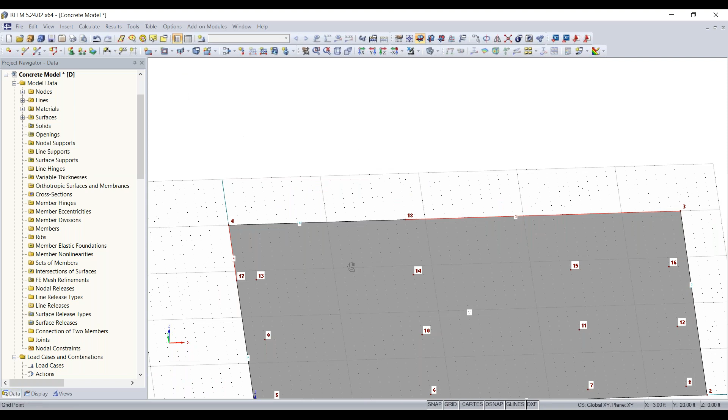And now we have our lines here divided, and I can now create a semicircle surface. This structure is going to have a spiral staircase on the right hand side of it, so I can create a different shape surface here. To do that, if I go up here to my new rectangular surface tool, I can hit this little arrow here and get a nice drop down, and you'll see we have a bunch of different shapes here.

So we have rectangle, circle, semicircle, ellipse, and polygon if you want that. You can also draw out your lines anywhere on the grid and then select the boundary lines to create a different shaped surface like that. So I'll select semicircle, and everything here is defined correctly, so I'll click OK.

Now I'm going to just choose the center of my semicircle, which is going to have a radius of 7 feet, so I'm going to choose it 7 feet from that top corner. So that should be at 33. Then I can choose that center and click a second time on the corner node there. And now I have my semicircle surface drawn here.

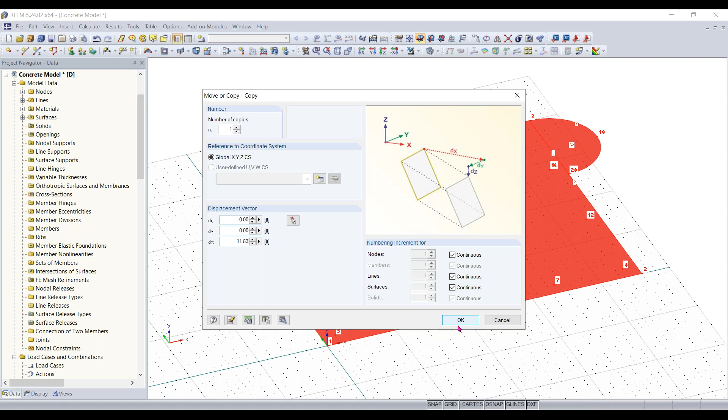So basically what I can do is highlight my slab here, and then I can move/copy it. I'm just going to make one copy of it, and I'm going to have it be displaced 11.83 feet into the Z direction. To take into account the thickness of the two slabs, I need a clear height of 11 feet between the two, so the 0.83 feet comes from the thicknesses divided by 2 and added together. So we'll click OK, and now we have our two slabs here.

Something I want to point out is that the center line of any slab in RFEM is in between the thickness of the surface. What I mean is, right now the thickness of the slab isn't being rendered, it's just a 2D element. But if I go to display, rendering, model, solid model, surfaces, and choose filled with thickness, you can see we now have the thickness of our slab, and the center line lies halfway between the thickness. That's why I added 0.83 feet to the height, to make sure the actual distance between these two slabs is 11 feet.

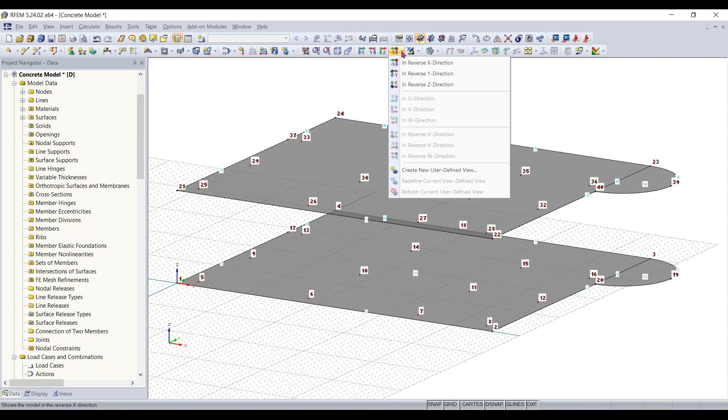I'm going to turn that rendering back to just filled, and now turn this into a different view. Right now I can turn this into an isometric view, which is very handy, and then into a perspective view if I like. The nice part about a perspective view is, if we're looking at the model in the reverse X direction, I can get a look at both the ceiling slab and the floor slab.

Now the next thing I want to do is divide this line here, line 16, so I can get a center point for my spiral staircase. I'm going to double click and select line 16, then right click and go to divide line, then distance. Right now I have line 10 selected since it's lying on top of 16, so I'll type in 16 manually. I want to divide this line a distance of 7 feet from the start, so I get a perfect node right here in the center. I'll click OK, and now I have my node here.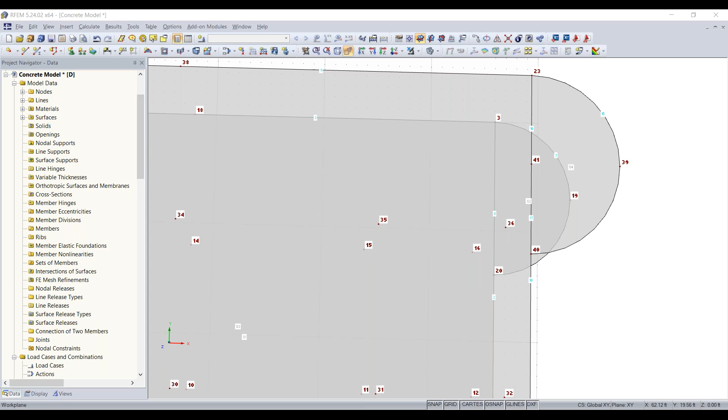What I want to do is make sure this line 10 is split at this node, so when this line comes into contact with line 10, I want that split. I can use my tool called Connect Lines or Members, then simply highlight node 40. Now you can see line 10 is separated into lines 17 and 18. This will allow me to delete lines 16, 17, and 18, which I'll do once I can delete the surface.

I want to join these two surfaces together, the semicircle and the rectangle, and now I can delete lines 16, 17, and 18. Another way to do this, other than graphically, is to go into the project manager or navigator and go to lines. If I select lines 16, 17, and 18, the project navigator is synced up with the work window, so I can see exactly where these lines are. I can just hold shift, highlight and select all of these lines, and hit delete. Now I just have the boundary line of my ceiling slab.

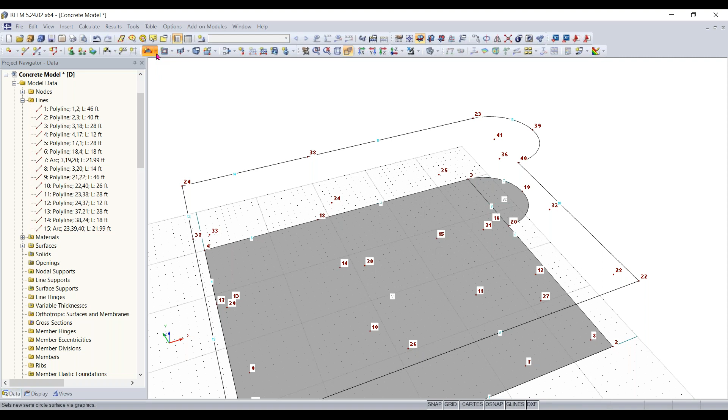What's nice is I can simply turn this boundary line into a surface by going up to the new surface button, hitting the drop down, selecting boundary lines, and choosing my parameters. I'll change this 8 inches to 12 inches for the ceiling slab, click OK. Now it's asking me to select my boundary lines, so I'll do that graphically. Now we have one surface here instead of two, just one rectangle or one large surface.

I'm going to take this out of perspective view, go into isometric. Now the next thing I want to do is add an opening to our top ceiling slab. Adding openings in RFEM is really easy - we have a tool for it, and it automatically integrates the opening into the surface.

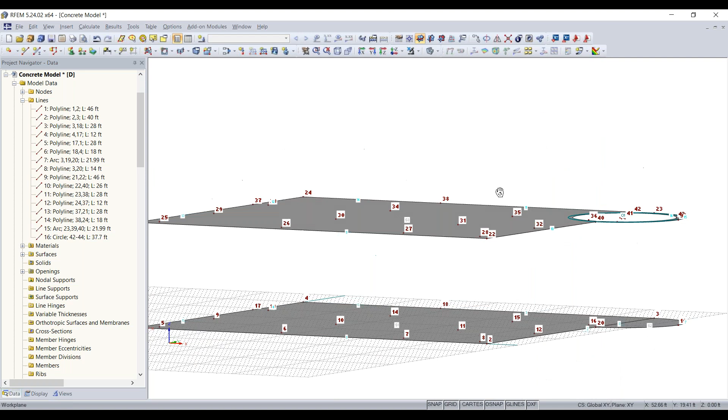I'll go up to the opening tool, and this opening is going to be a circular opening. All I need to do is select the center point - now you can see why we divided that line, I have my center point here. I can select that, and the opening is going to have a radius of 6 feet, so I'll go over in this window, type in 6 feet, hit enter. Now I have my circular opening, and that will act as the opening for the spiral staircase.

Now the next thing I want to do is add the walls to our model here. So I'm going to rotate this so the right hand side is facing the front here.

Basically, to add in the walls here, we just want to define our boundary lines. So really easy, I'm simply just going to divide some of these lines here so we can get some intersection points to draw our lines. So this first line is going to be at 7 feet away from node 20 here.

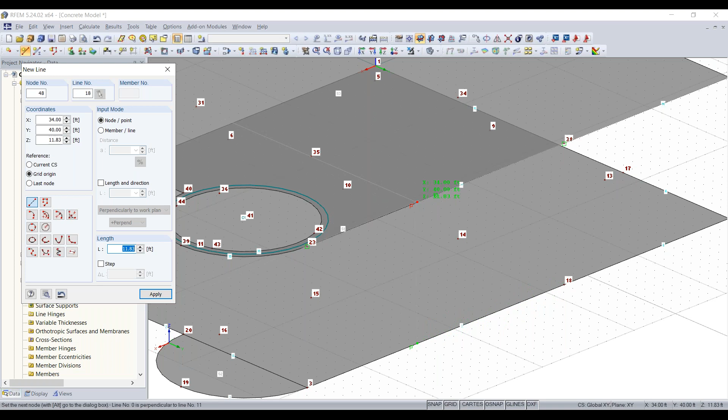So now the next thing I need to do is just connect, or actually we're going to draw one more line in the back here. And this one is going to be 12 feet away from our staircase here. I'm going to draw that at 34, 40. There we go, we can snap to our point there and right click.

And now we have two lines here. And now all we have to do is connect some more nodes here. So nodes 20 and 40 will be connected. And then 3 and 23. 18 and 38. 4 and 24. And then last but not least, 17 and 37.

So now that we have all of our lines for our walls here, I can right click and exit out of that tool. And all we have to do now is, well, first before we make any of our walls, we need to use the connect line/members tool and simply just highlight our whole model. And that will split up any intersections with the lines, creating new lines. And now we can use the tool select boundary lines, and with this, I can simply just select the boundary lines to create my surface.

These walls are going to be 8 inches thick, and then our concrete is going to be the same, 4,000 PSI. So we'll click OK.

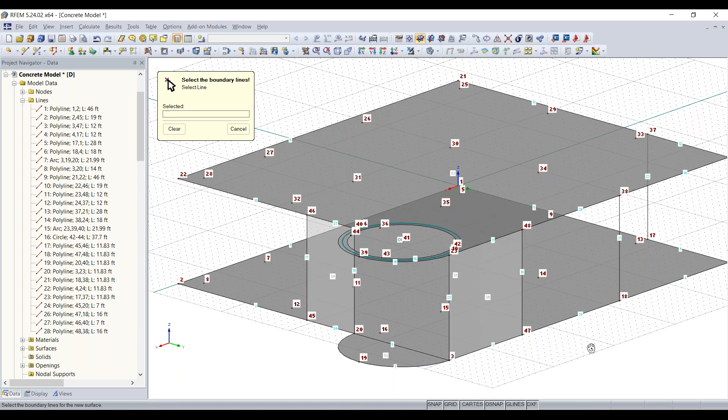Now we just got to do one more. And now we have almost all of our walls created. The last wall we still need to create is this curved wall here for our staircase. And this can't be done with any of these surfaces because it's out of plane, it's not located in one single plane.

So what we have to do is go over here to this drop down here for curved surfaces. So I can go over here to the quadrangle tool, click on it. It's going to be 8 inches, same material. I'll click OK, and now I can simply select the boundary lines for this curved surface. And now we have our curved surface for our spiral staircase.

Next thing we're going to do is create our columns. And one other thing I did forget to do is we did have one more wall to create. We do have one load bearing wall right in the center here that connects nodes 18, 38, 34, and 14.

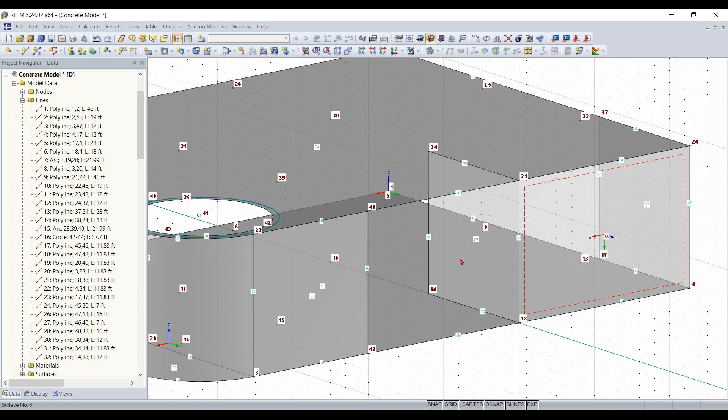So now we have that created. I'm going to turn this back into my XY plane. Now we just need to create the columns. There are lots of different ways to do this.

I know we went over how to create columns using this button to create a new single member. A different way would be to create a new line, connecting these two nodes here, 6 and 26. This is useful if you already have a line created and want to turn it into a member. You can double click on any line here.

Within the edit line window, there's a tab called member. If I go to member, then available, this will let me create a beam from the line, or a column, or any member you'd like, basically.

I can go to import from cross-section library, and then tell it what cross-section I would like. Parametric massive, since this will be a concrete column. The base of this concrete column will be 14 inches by 14 inches, and the height will be 14 inches. Then I'll click OK.

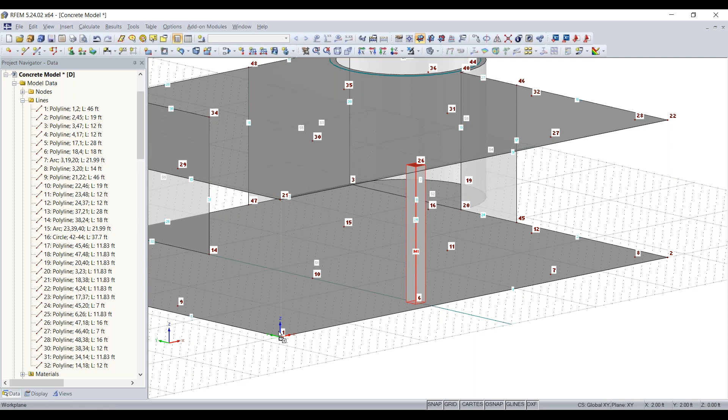We don't have to create the line and connect these nodes each time. What we can do is use our workflow of selecting the member, holding Control, and dragging right at the node. Then we can create the rest of our columns doing this.

Oops, Control Z. Let's try that again. And then we will have our row of columns.

Now that we have a row of columns, we can simply copy them again, and then we don't have to worry about creating them again.

One thing I'd like to show is if we go to our table, for example, if I wanted to see what kind of members I have in my model. I can expand this table, and right now I'm under material, so I can see which material I have throughout my model. I can also go to the tab members here, and now I can see I have all 4 of my members, with their beams and member types.

I can see the type of cross section they're made of, and I can select them in the table individually and change things about them if I'd like, like the member type. So the tables are pretty powerful for quickly seeing different model data, especially if you have a large model, and changing it very quickly. This is an easy way to do that.

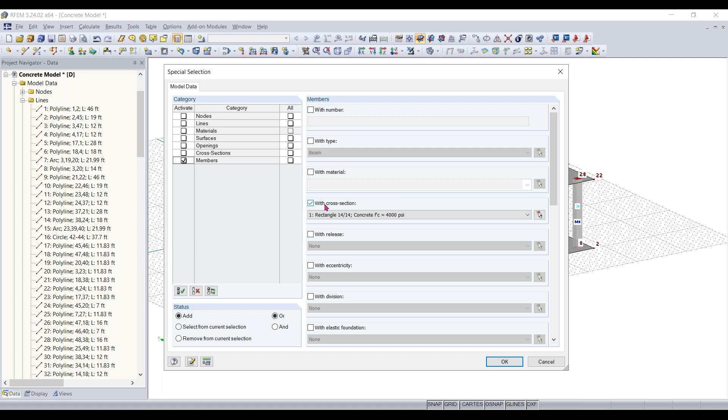I can simply tell the program I want to select members, and I want to select only members that have a cross section of 14 by 14, then click OK. Now the program will select all of the cross sections with 14 by 14.

That makes it easy if you have a large model with lots of different smaller elements that are hard to select. So then we can just simply take this, hold Control, and drag. Let's try that again. There we go, so now we have our copy of our columns.

The next thing we need to do is just add one more column to connect nodes 15 and 35 here. Then we'll be done creating our columns.

All right, so we're going to let that one go and simply just draw that one out. There we go. And now we have our columns created.

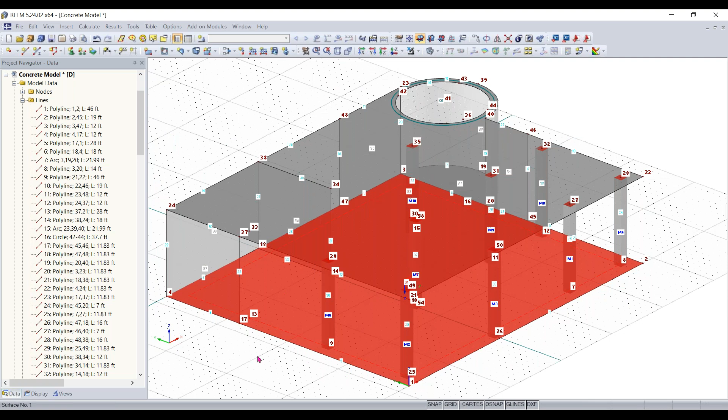And now we just need to create our last element, which will be our downstand beam. That will connect from 37 to our load bearing wall to our column over here. I can simply just delete node 33 here, as we don't need it.

And I can go up here to create my new single member. So this one will be a cross section of 12 inches by 12 inches.

So I'll go to my cross section library, and again, this will be a parametric rectangular section, and it'll be 12 inches by 12 inches.

And this one will be a different member type. So this is going to be our downstand beam, and it's going to be dropped down right flush with our surface, or our ceiling, here. So what I want to do is change this member type to a rib element.

And a rib element will also have integrated widths with it. So what I can do now is change this to a rib element.

I get this edit member type button here, and you can see what this rib element will look like. It's going to be integrated with our ceiling, with our slab, and it's going to be dropped down to be...

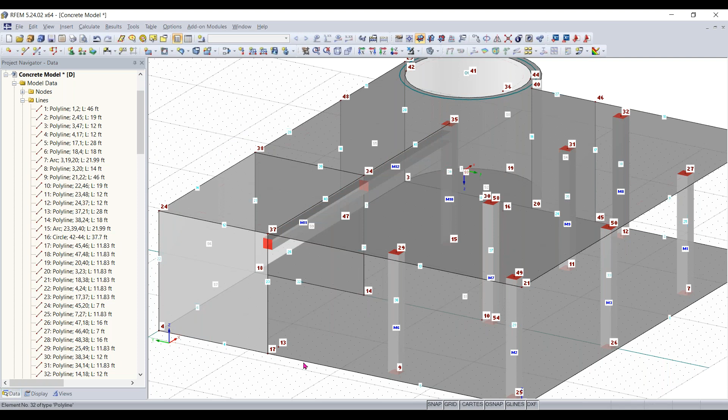And now we have our rib element created. You can see that it's dropped down below the surface. So everything there is defined correctly.

And now we need to create an opening in the back of our model here. So to do this, I'm going to change the work plane again to the XZ plane.

And then I'm going to change again the origin of my work plane. And now I can simply draw on this surface the opening.

And it's going to be a rectangular window basically, 9 feet wide and 5 feet high.

So we'll go down here, and we'll go to the coordinates 3, 0, 5. And it's easier to see the grid points if I change this into a wireframe view.

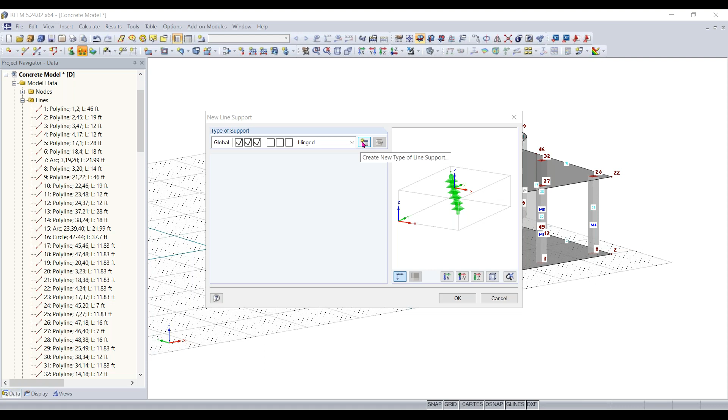And with these, I'm going to create a new type. So I'll just turn off the translation in the X and Y and release those, because these supports - we're pretending that this structure is sitting against another structure adjacent to it, so it's able to be supported in that way.

So it's only being supported in the Z direction. And so now we have our supports there.

And then we can add in our surface supports by just double clicking on our surface and hitting edit, or just going to the edit. And then we can go to the tab support/eccentricity and then hit available. And for our surface support, there's only going to be spring constants.

For the X and Y, we're going to have a spring constant of 640 kip per cubic feet for our X, Y, and Z. That is going to be our foundation modulus for the gravel that's underneath our structure here. And then for the shear, we'll have spring constants of 32 kip per feet and 32 kip per feet.

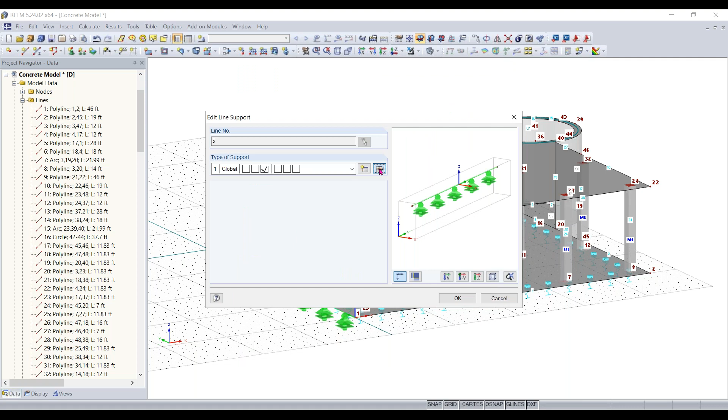And I'd also like to add that this is information that the engineer might get from the geotech report. This is not something that we can necessarily give advice on. It depends on your soil parameters. Again, most likely this comes from the geotechnical report where they give you a soil spring stiffness.

Yeah, thanks for that clarification, Amy. That was mostly for example purposes. So I'll hop back. And if there are any more questions, you can email us, and I'll go through our contact email and everything. I don't think there doesn't look like there's any more questions, so basically I'll start concluding.